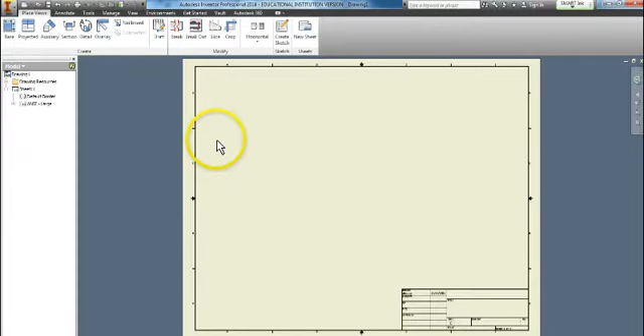To start, I'm going to go up to the base view, and I am going to find the boat that I put together with all my components on it. So I'm going to open that up.

I'm going to keep the scale as a 1:1. I'm going to drag this just off to the side. Now you can see I don't like that position of my boat, so I'm going to change the orientation over here to something that's a little bit more conducive to what I like.

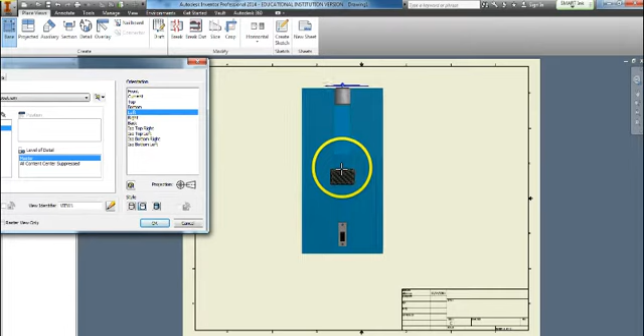So right now here's the left, that's a pretty good picture, kind of at the top. If I don't like these pictures, I can go back into my boat and I can change the view of which it's sitting at. So I'm going to start with the top view.

I'll right click and done, click OK. And I'm going to annotate.

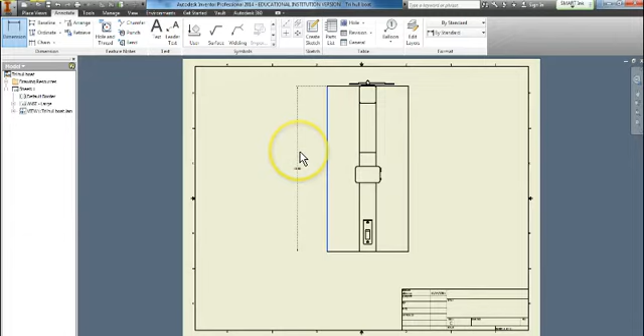I want to give dimension and size to these particular pieces. So really for the grade, I need to know overall length and width. You might need to include some different dimensions if you're building it, like for instance how wide this certain piece is. So just some specific dimensions to your boat might help when laying this out. So I've got some specific dimensions on there.

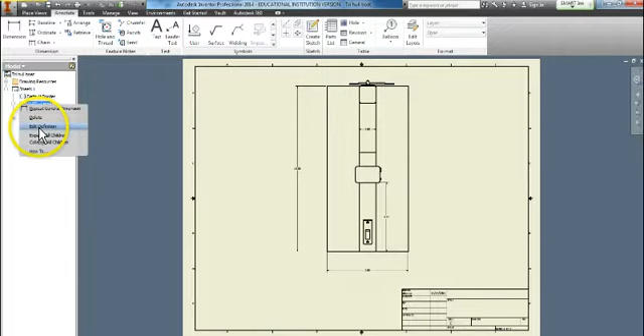I'm going to go back and change the title block. To change the title block down here, I'm going to click on ANSI Large, right click and edit definition. Once I get my editing window, I will change the title to My Boat Top View.

You will need to generate a top, a front, and a side view all individual. I will click OK. You can change your creation date to the specific date that it happens to be.

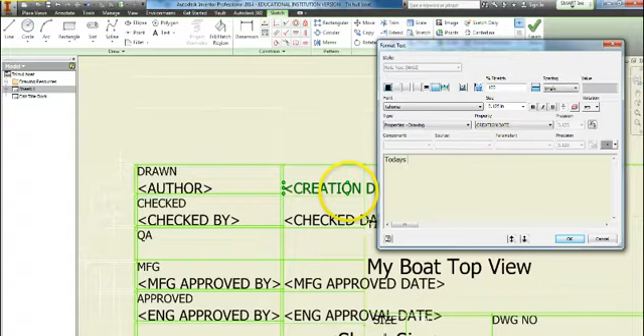Whatever it might be, put a number in there. You can change author and things like that. Make sure your title block is completely filled out. Once it's filled out, green check mark, finish sketch, save the changes, yes.

And then we can go to print. When I want to print this, I'm going to go to iPro. This is important that we follow along. Click print. But now we don't want to print model 1:1 because this sheet of paper is bigger.

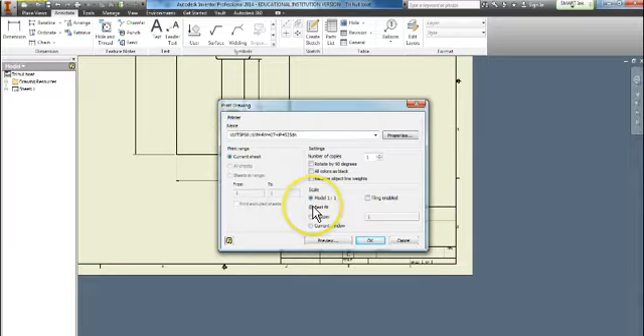So I'm going to select best fit. I'm going to check preview, so it looks like it fits all on one page. Now I'm going to go back to print and I will fire that off.

So with that, after you have this top view selected, you can then do a side view as well as maybe a front view of the boat as well, so that we can get all 3 views. Once that's completed, your technical drawings for how to build your boat are complete. And just make sure that you finish a poster along the way.